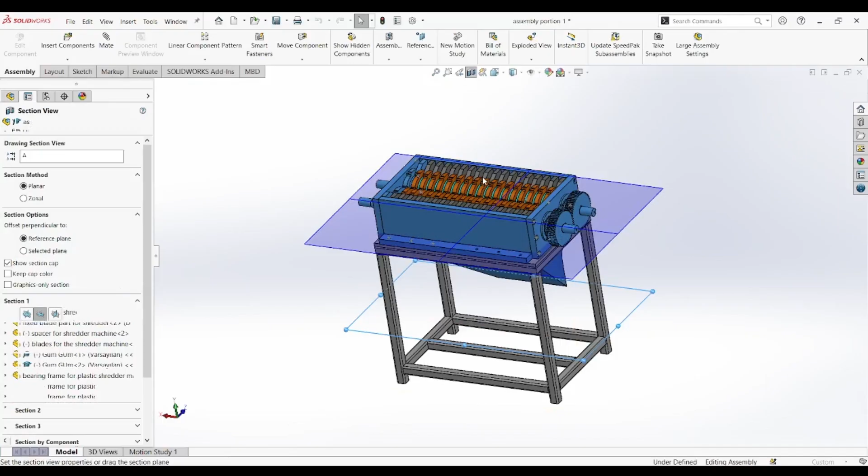Welcome to Blueprint Bazaar. In part 17 of our plastic shredder machine full assembly walkthrough, we focus on a fundamental mechanical detail that ensures the longevity and smooth functioning of the system: installing bearings inside the mounting plates and validating their alignment using the powerful section view tool in SolidWorks.

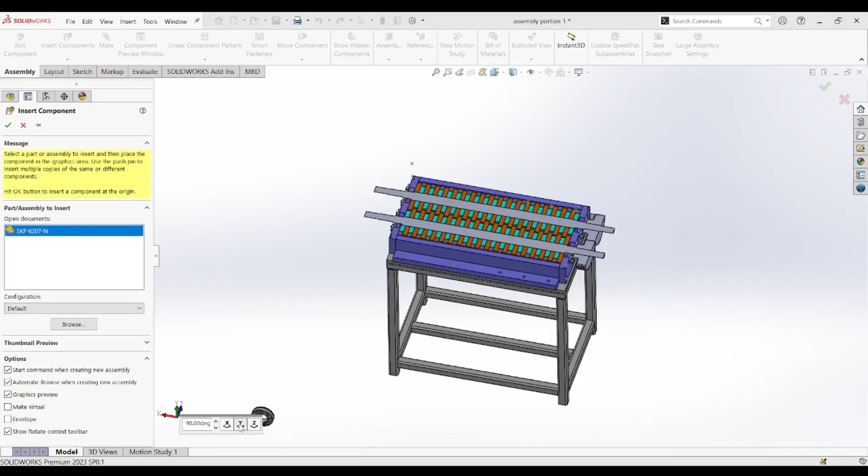With the shaft, gear, and bearing covers now in place from the previous parts, it's the perfect moment to add the critical components responsible for reducing rotational friction, the bearings. We begin this part by bringing in standard bearing components into the SolidWorks assembly.

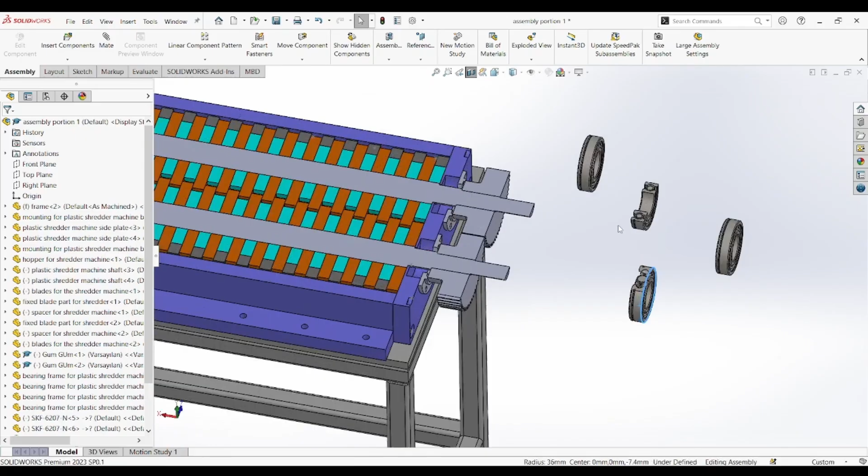These bearings were selected according to the inner diameter matching the shaft size and the outer diameter that fits snugly inside the pre-designed recess in the mounting plate. The initial placement is followed by a concentric mate between the bearing's central hole and the shaft's cylindrical surface. This mate ensures that the bearing's axis aligns perfectly with the shaft's rotational axis.

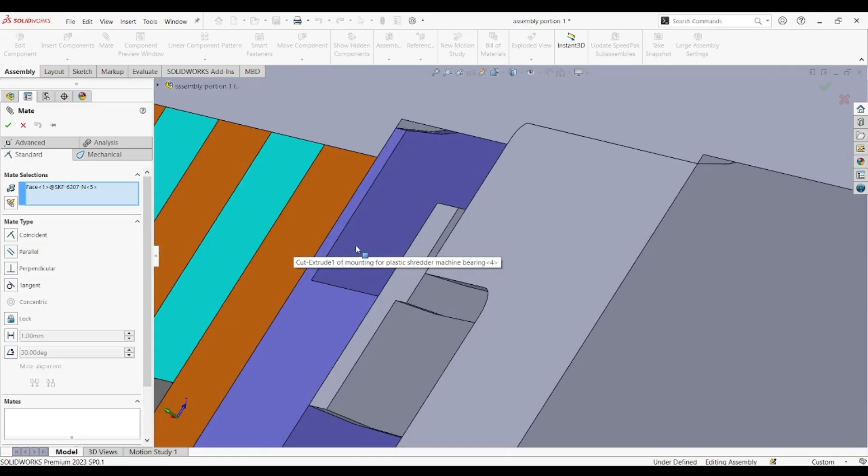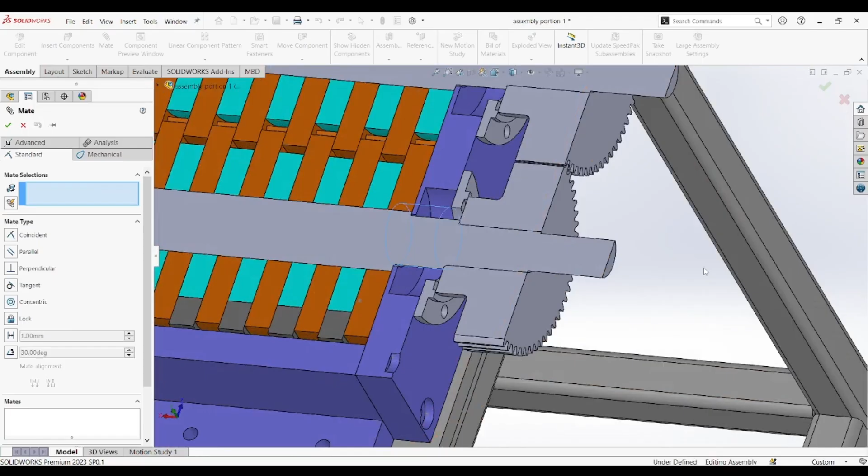Once the bearing is aligned concentrically, we move on to mate its outer cylindrical surface with the inner cylindrical recess in the mounting bracket. Here, a concentric mate, again, ensures that the bearing housing and mounting plate stay aligned. A coincident mate is then applied to the back face of the bearing to rest it flush against the shoulder or stopping feature within the mounting hole. This controls the axial depth and ensures the bearing doesn't float or misalign.

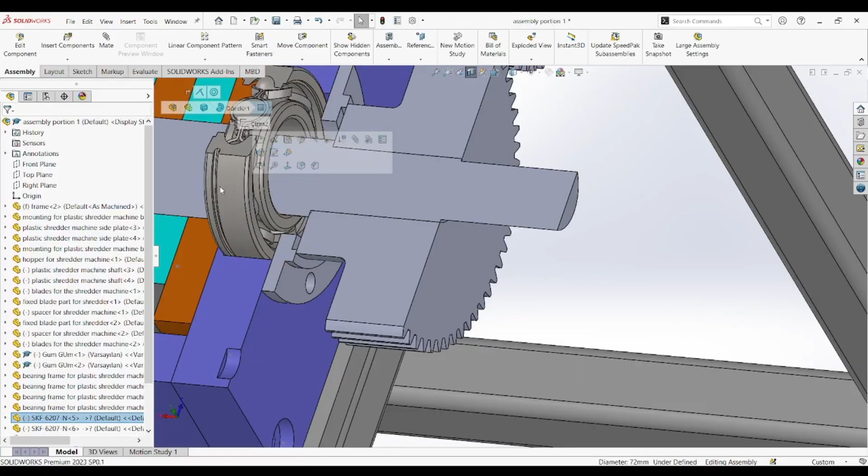To verify whether the bearing is placed correctly within the assembly and is interacting precisely with both the shaft and the mounting hole, we utilize the SolidWorks Section View tool. This tool allows us to virtually slice through the assembly and view the internal interfaces. With the section applied, we check the following.

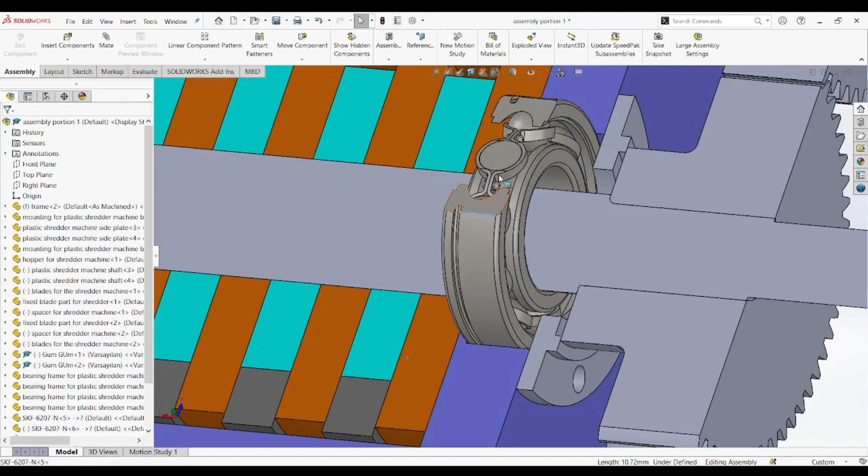Is the inner ring of the bearing fully contacting the shaft? Does the outer ring of the bearing rest tightly inside the mounting hole without excessive gaps or overlaps? Is the bearing aligned straight and not skewed at an angle that could cause binding during rotation?

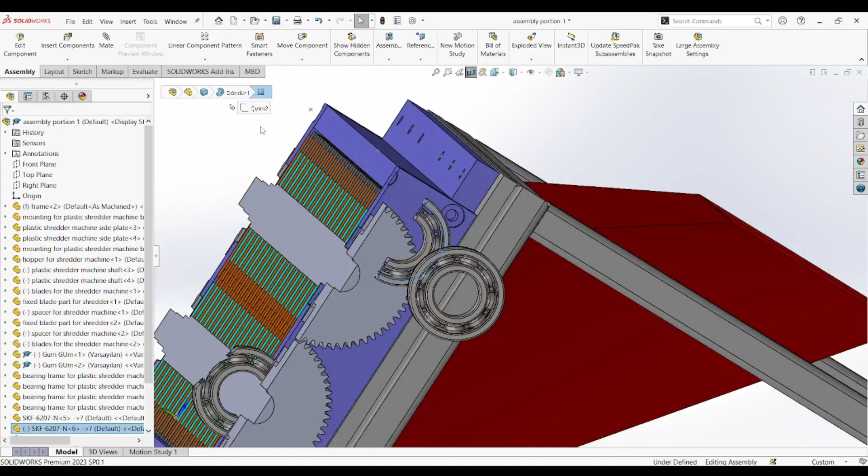These verifications are crucial. If the bearing is not fully seated, it could spin within its housing, leading to wear or even complete failure. Similarly, if the bearing binds against the shaft, or if it is misaligned, it can generate heat, noise, and vibrations, significantly reducing the shredder's mechanical performance and lifespan.

After confirming the first bearing's position with the section view, we repeat the same process for the opposite mounting bracket. The same mate approach, concentric and coincident, is applied, and the section view tool helps ensure symmetrical installation. Proper alignment on both sides means the shaft is now supported uniformly at both ends, which is essential when the machine begins rotating under load.

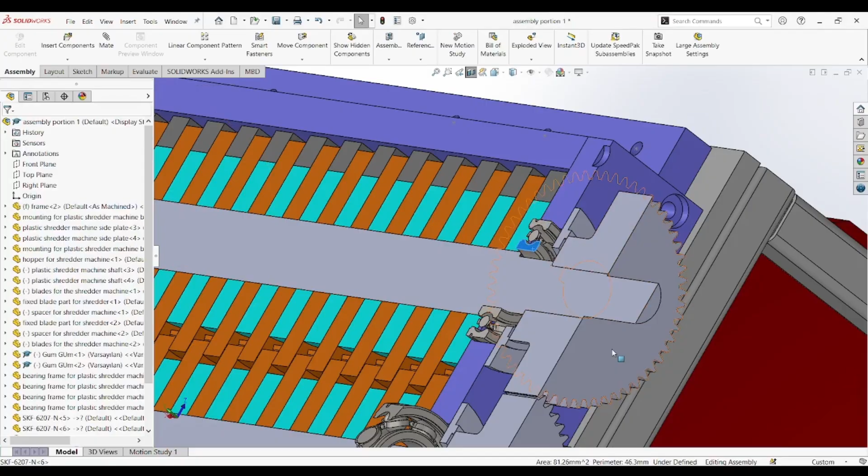A quick manual motion test is performed once both bearings are in place. We rotate the shaft and observe its interaction with the bearing's internal ring. A smooth rotation without wobble confirms a proper fit. Additionally, we make sure that the shaft doesn't rub against the bearing covers or touch the mounting walls. Any contact could lead to additional friction or shaft wear.

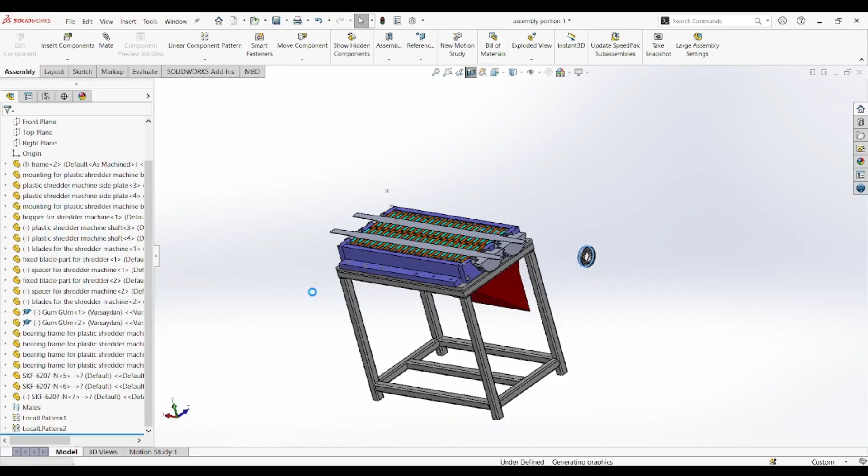This part is particularly beneficial for viewers looking to understand the role of bearings in CAD assemblies and how real-world mechanical behavior is influenced by small details like fit, spacing, and alignment. We talk about tolerances, ideal spacing, and how real bearings require just enough play to rotate freely, but not enough to vibrate or dislocate. We also discuss the importance of axial restraint.

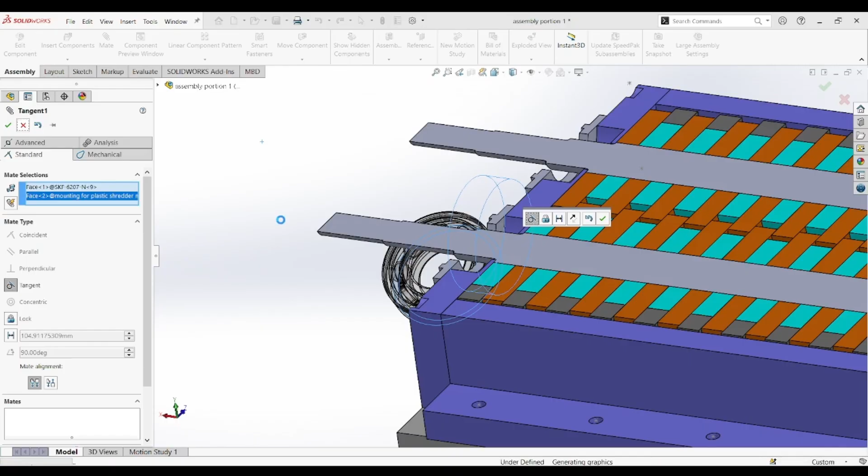Bearings themselves don't always prevent the shaft from moving left or right unless they're specifically designed with flanges or retainers. So placing them snugly inside accurately dimensioned recesses ensures that the shaft remains fixed in position even when torque is applied during shredding.

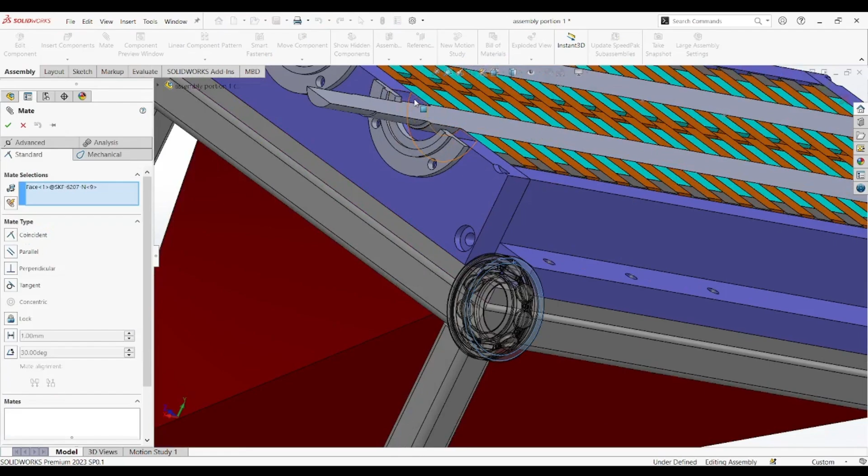Another key insight in this episode is how SolidWorks tools like Section View aren't just useful for presentations; they're essential for design accuracy. Complex assemblies, especially those with internal components, often require inspection beyond what's visible on the outer surfaces. Section view gives you the power to visually inspect and correct these hidden connections before moving to manufacturing. Moreover, this part introduces new users to the practice of precision modeling for motion systems.

Beginners might often overlook bearing fits or rely solely on visual alignment, but through this walkthrough, they learn how to inspect, adjust, and validate these aspects using built-in SolidWorks functionality.

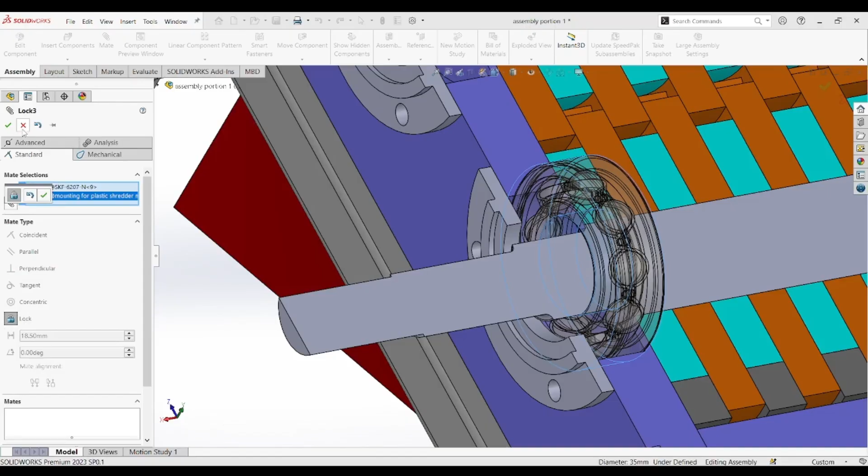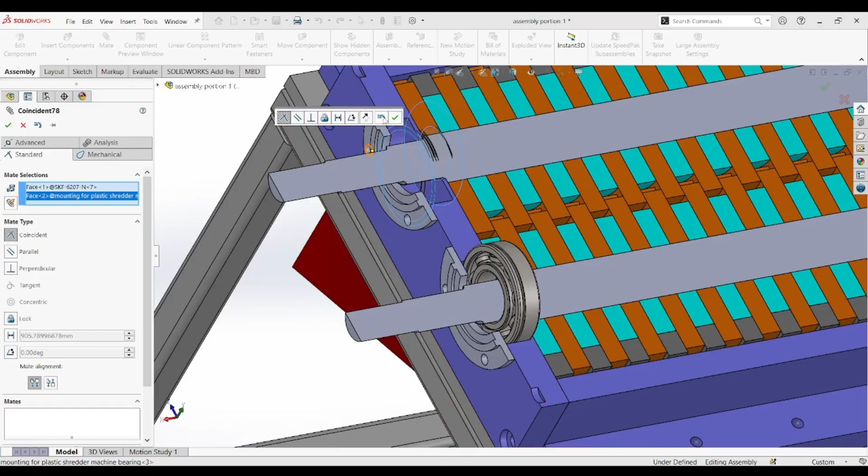In our final segment, we reiterate why this bearing installation step is a foundational milestone for the entire project. The shaft, now supported by both inner bearings, rotates reliably inside the structure. All moving parts up to this point, rotating blades, spacers, and gears, now have the required support to move without misalignment or drag. This not only prepares the shredder for future motion simulation, but also ensures that when we add the motor and transmit torque, the system will remain mechanically stable.

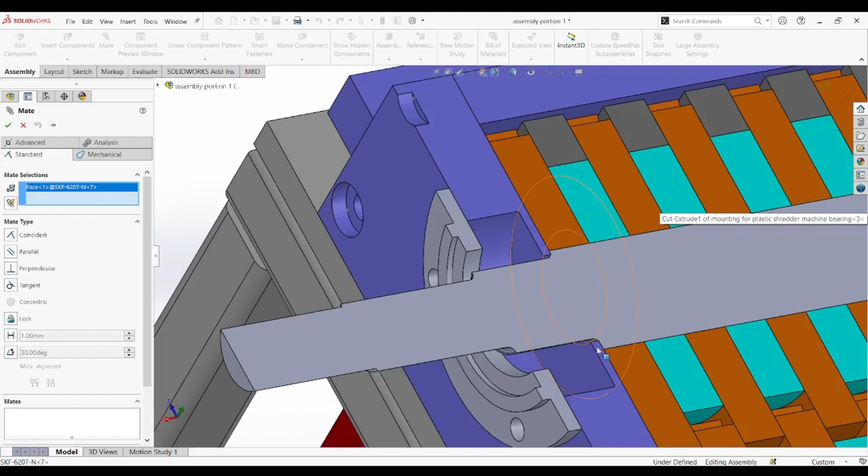If you're designing your own shredder or any rotating machinery, this part offers insights into bearing placement and alignment, fit tolerance importance, section view usage for internal verification, and shaft stability under load. This is where CAD modeling begins to reflect real engineering behavior, not just a virtual design, but a truly manufacturable, functional system. Understanding and achieving ideal shaft-bearing interaction provides a practical learning opportunity.

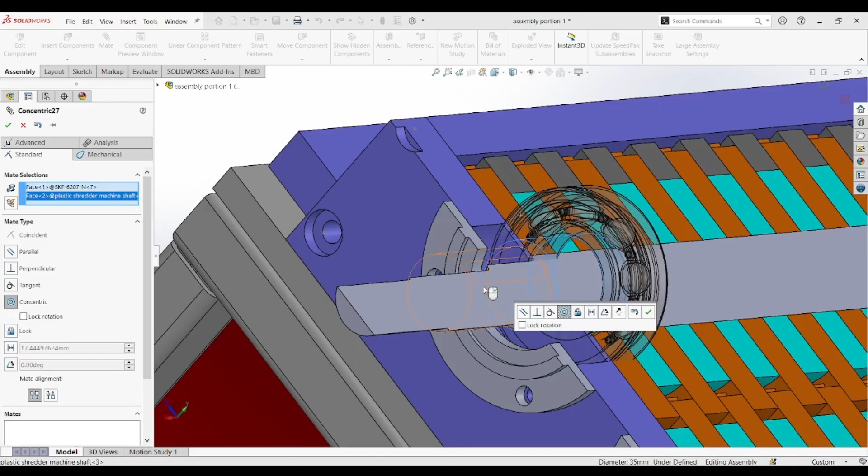This part reminds engineers that while components may seem correct in isolation, their behavior under constraint and contact determines real-world performance. By taking the time to evaluate these relationships, you improve product quality and reduce risk during actual fabrication and testing. This process also teaches you to model with intent.

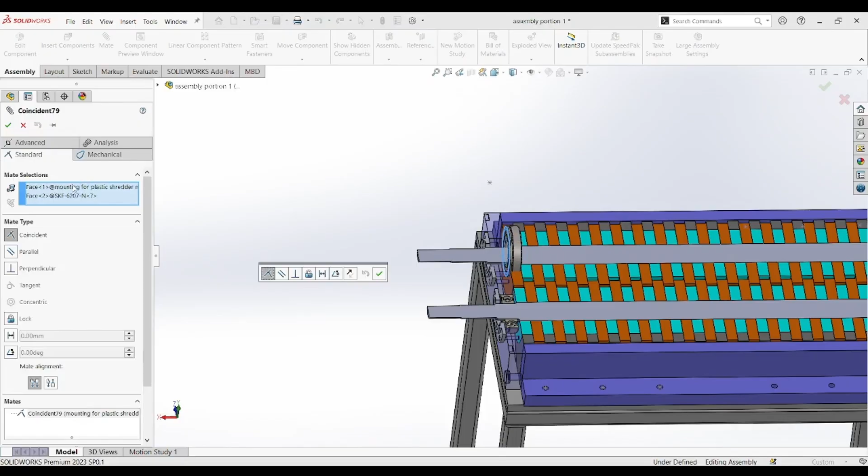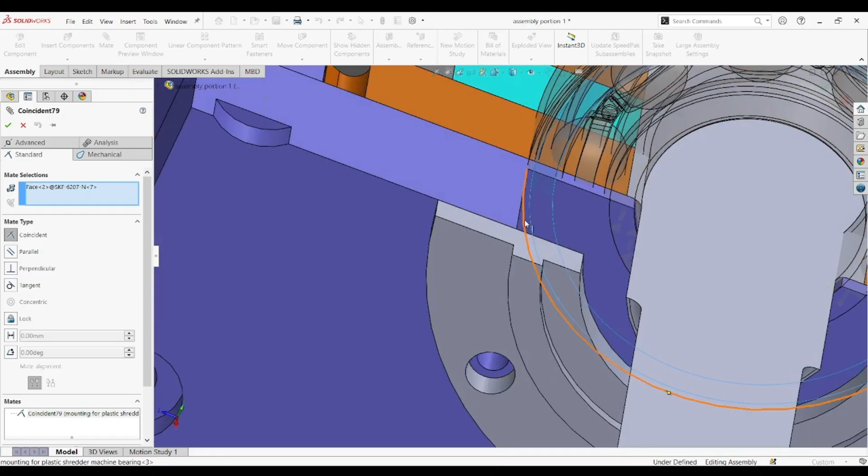Rather than just placing parts into an assembly, each component serves a role, and each mate carries implications for mechanical behavior. The shaft won't just spin, it must spin true. The bearings aren't just placeholders, they are the mechanical boundary between motion and frame. That intent needs to be respected in your modeling process.

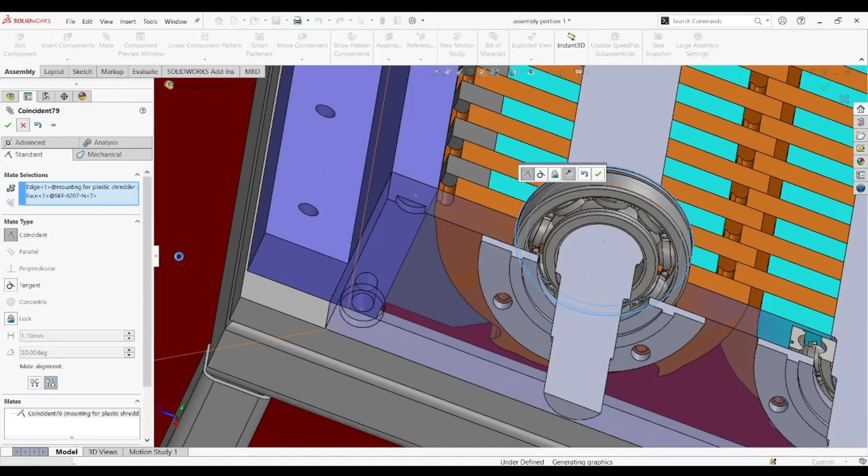For teams collaborating across mechanical design and manufacturing, this part offers a communication bridge. Section views, bearing placements, and shaft alignment notes all help reduce ambiguity. Fabricators will know where bearings must press fit, where shoulders stop motion, and what tolerances they're expected to meet, all before a single chip is machined.

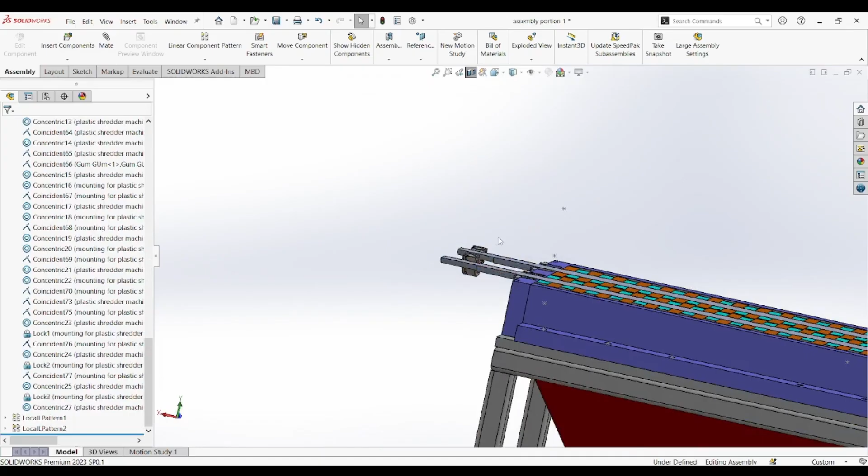It's also worth noting how SolidWorks empowers you to iterate without risk. You can test different bearing sizes, explore tolerance gaps, or evaluate movement, all before manufacturing. Learning to simulate and visualize these conditions helps new designers build confidence while offering professionals a toolkit for verification. Even experienced engineers benefit from pausing to revalidate something as basic as a bearing.

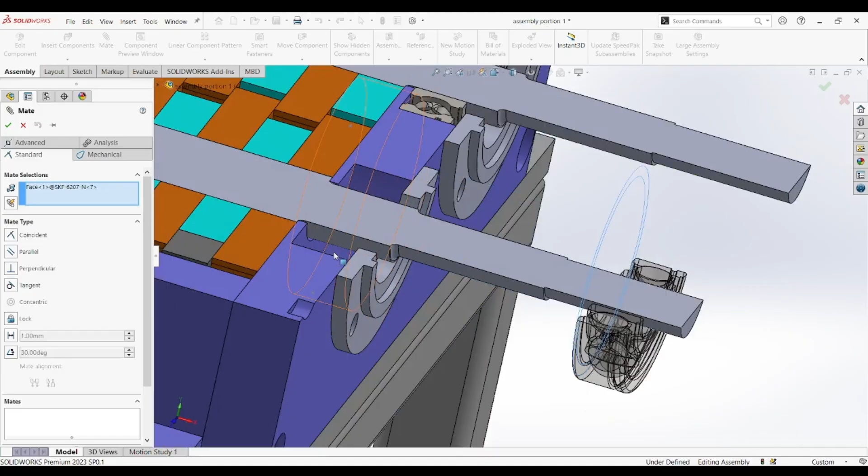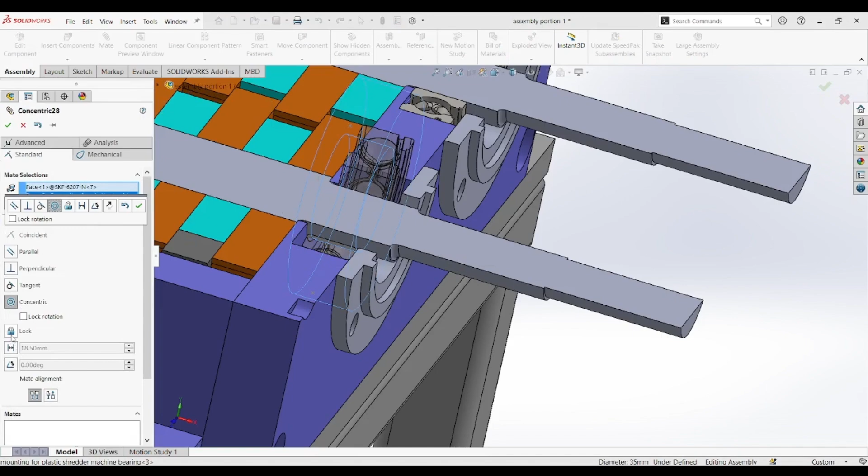In high-speed or torque-driven systems, even minor misalignment can cause major issues. That's why this part doesn't just feel like assembly, it feels like insurance. Insurance against error, wear, imbalance, or failure. By reinforcing the physical expectations within a digital space, you ensure that every part assembled virtually mirrors what's required in the real world. This focus on accuracy not only improves performance, but can significantly reduce maintenance issues and downtime once the machine is operational.

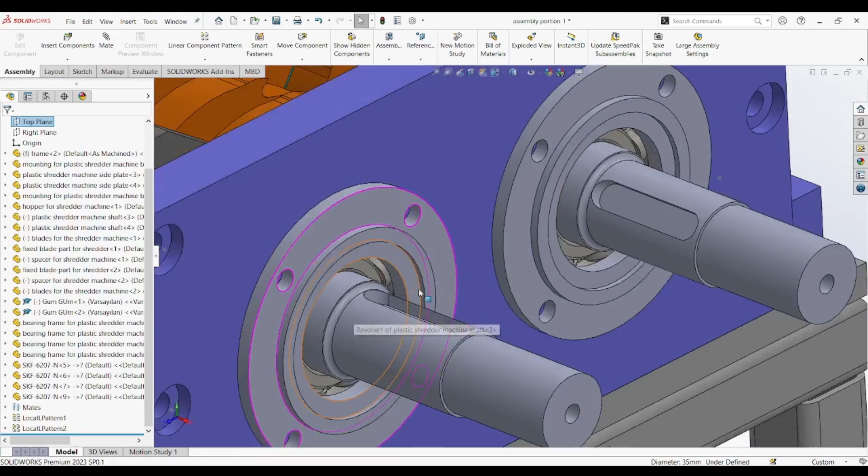This part also bridges the gap between CAD design and real manufacturing by emphasizing that mechanical reliability depends on precision at every stage, from virtual mates to physical tolerances. Proper bearing setup is more than just good modeling practice. It's a direct contributor to equipment life and operational safety.

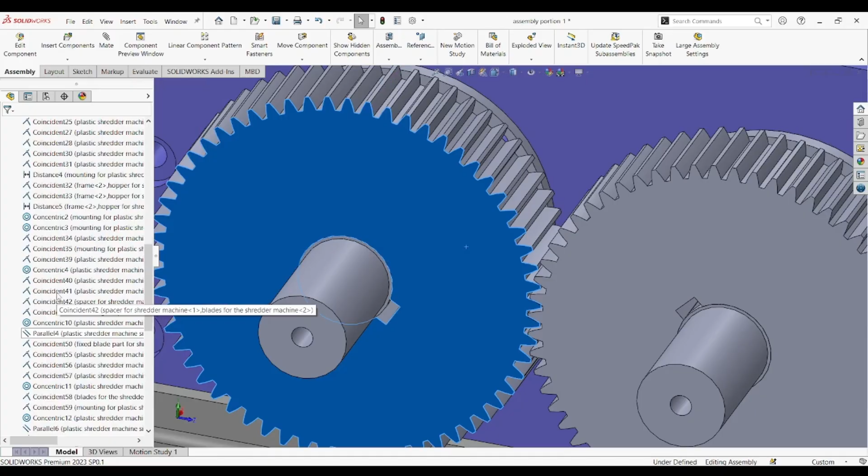Finally, by mastering the section view inspection process, you gain a powerful habit that extends far beyond just bearings. Anytime your assembly involves internal alignment, pressure zones, or friction-sensitive contacts, this technique becomes your first line of defense against future issues. And that kind of foresight is what separates good designs from great ones.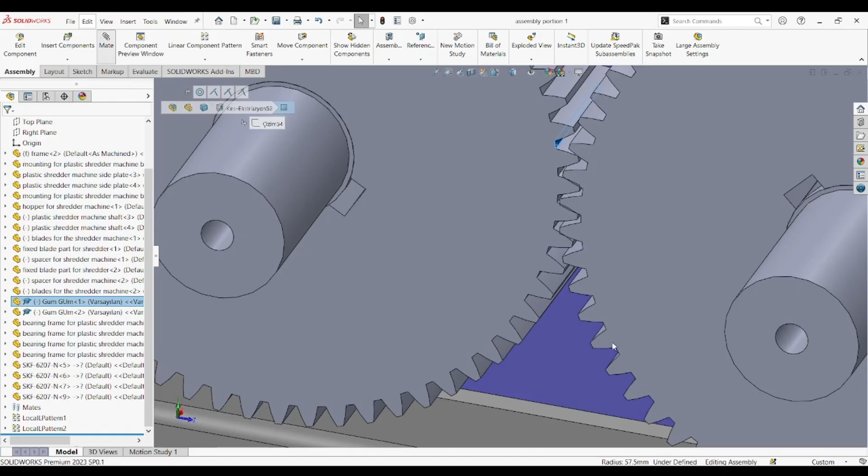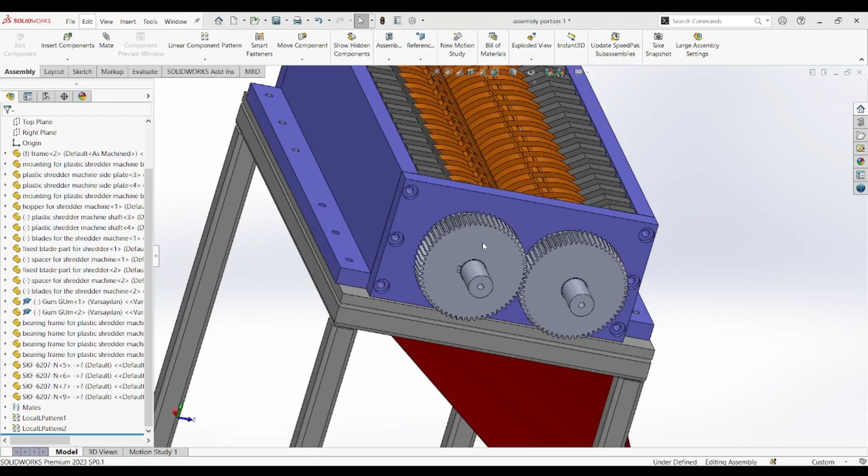In the next episode, Part 18, we'll move forward with the Toolbox section, where we add the screws, nuts, and bolts of the ISO standard, and prep the fixtures. With shafts, gears, and bearings all in their correct places, we have now completed the overall design of the plastic shredder machine, and in our bonus videos, we will continue with how to make the bill of materials, balloon insertion, some shortcuts, and finally, the simulation and animation process for the plastic shredder machine.